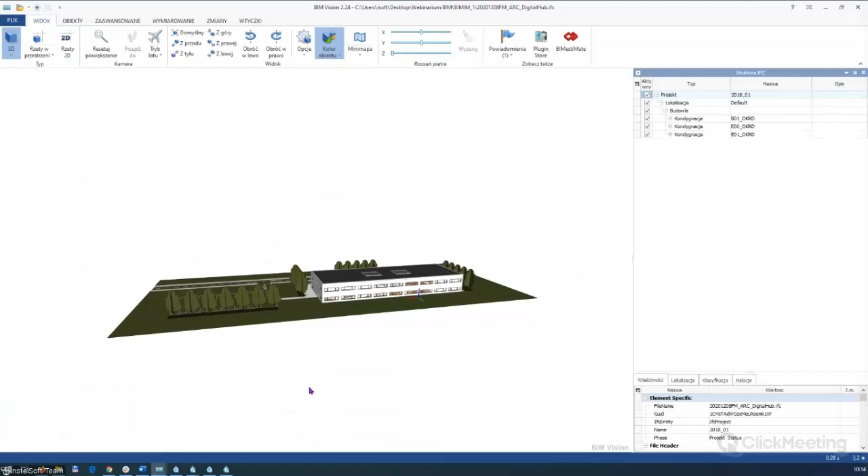First is this one, a simple office building in IFC format. That's the first one. The next one is

a sample from Revit. Maybe someone knows this project - when you open Revit software for the first time, you can find this project. We will also work on this file for today.

The next one is this one, a simple house. It's simply a 2-story house with a sloped roof, and the last one is that one.

It's the example of Villa Tugendhat from the Czech Republic. Maybe some of us know this project.

The scope for today's meeting covers many areas of our software, so some knowledge of our software is already necessary. In addition to the presentation of modules and the path of import and export of IFC files, we will also cover tools related to creating a building structure, calculating the heat load of a building, and designing both heating loops and water installation in the basic scope.

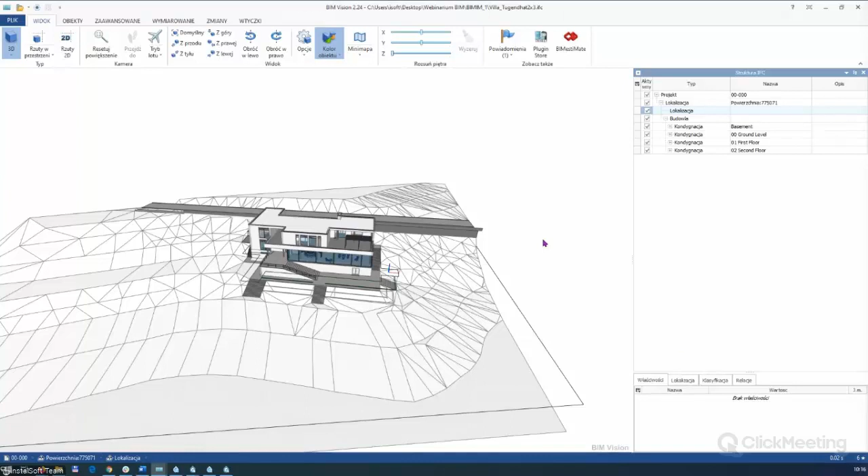So maybe I'll open a new project. A recommended path to use the program for importing and working with IFC models, with a discussion of individual tools.

Our new modules allow you to import a building model, including installation and equipment, from IFC files, both the older and the newer IFC4 version. Import is available under this button, so just click on it and choose your IFC file.

That's the first one, just click open. We have the possibility to open IFC files or IFC zip files. So I click open, and information import of the IFC file is performed as an independent model available in the underlay.

Maybe I'll change to the 3D view. That's our model from the IFC in InstalSystem 5. Loading the IFC model can be performed for any project, new or with an existing building structure or installation, including full delete and replacement of the existing model. So you can re-import this model if you need.

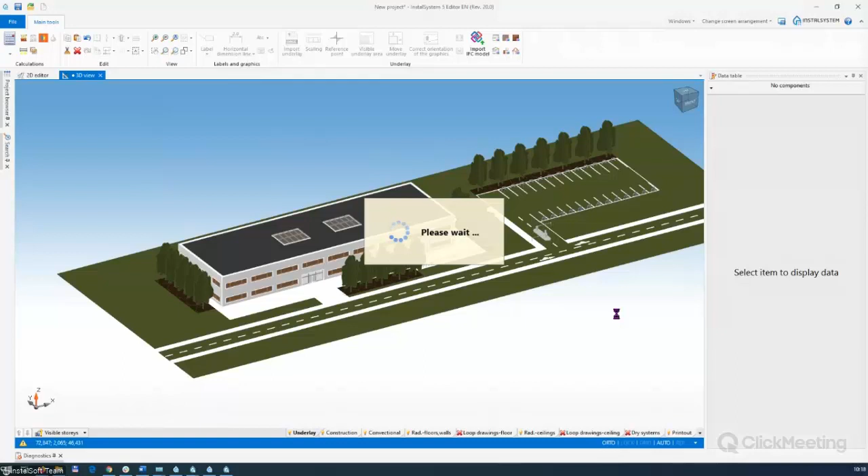This means that if we work with many industry professionals, there may be several such files in our project, and we can easily coordinate. When I unpin the project browser and change the scope to the underlay, as you can see, that's my first model - the architecture one - and that's the second one, the ventilation system.

We have the possibility of precise model management, including preview of the full structure of the IFC file, preview of the properties of each element, hiding and searching for elements using the project browser window. So I can unhide, for example, all the stories from these IFC files, and if I want to see only the IFC space, I can uncheck this one. Look at this - click on the IFC space, and the last one is the IFC space.

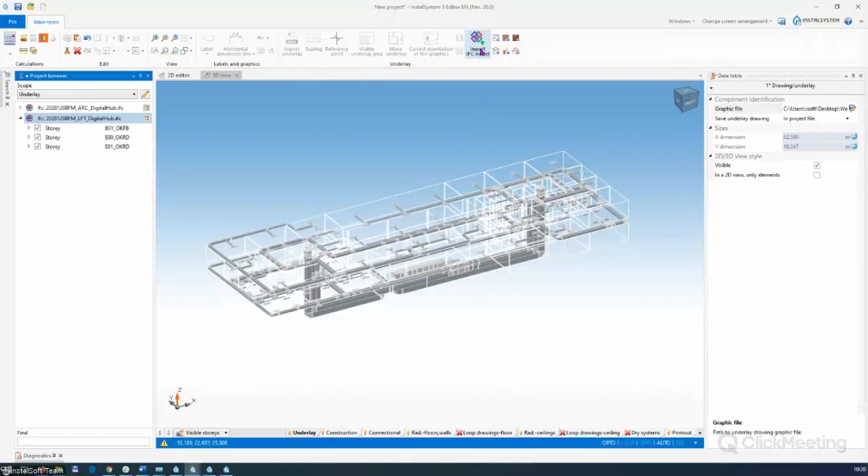So now I have two models. First is the architecture one with the IFC spaces, and the next one is the ventilation system. Remember that if you have a much bigger project, for example a heating installation, you can open this model. Please wait, and you can see it in your 3D view.

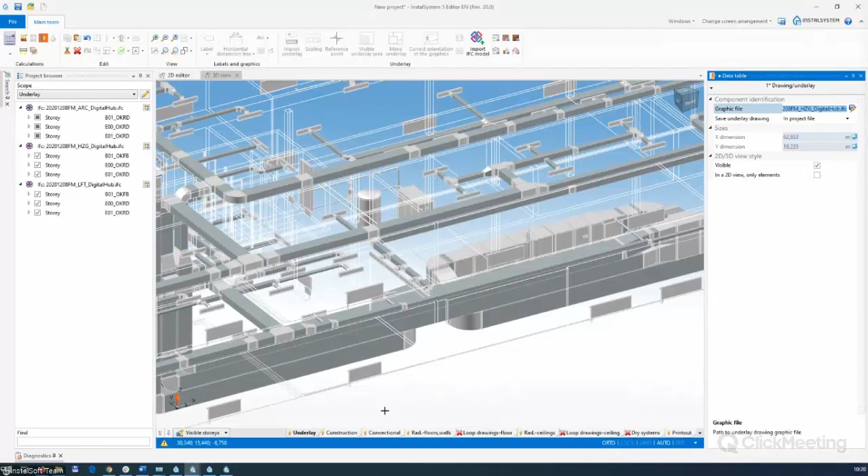Yes, and at this point there has been a great rebuild. So as you can see, we can preview in a very precise way the entire structure of the IFC files and expand the structure into individual branches. This is a great help.

Using this button, you can expand the detailed view of a given IFC model. As you can see, we can load IFC models containing both our architecture and installation, designed and exported previously from the InstalSystem 5 program and from other programs.

This means that we can hide or show down to the smallest elements or given groups, with the help of those things we want to see in our program, which has an impact on our design installations. All of this is also associated with the data table.

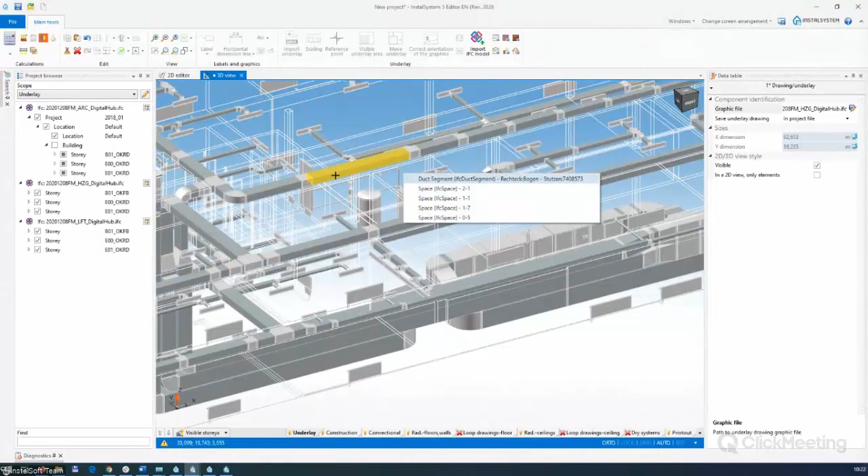There you can find information displayed about each of the items in the IFC files. For example, I can click on this one - it's the duct segment. As you can see, we have information, we have this element in the project browser.

You can click the right button, find in active windows, of course. So this is this element, and here you have information in the data table. If you want, you can make this element invisible - it's working in the project browser, 3D view, and data table elements.

The whole is additionally supported by the search window, in which we have prepared some predefined elements. Maybe I'll unhide this project browser and unhide the search window, and as you can see, we have the search of the underlay scope, and here we prepared some predefined IFC elements. So if you want, you can choose select in rectangle, for example, or select all.

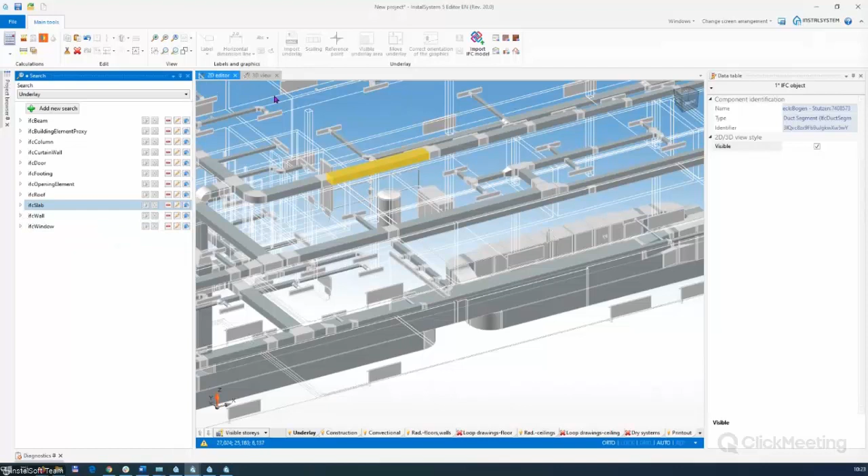You can unhide elements from the IFC file if you want. What's the important information? It's the new one, because the model is visible both in the 2D and 3D editor. The 2D editor draws it as edges, and the 3D view shows the real model. Of course, the whole thing is interdependent.

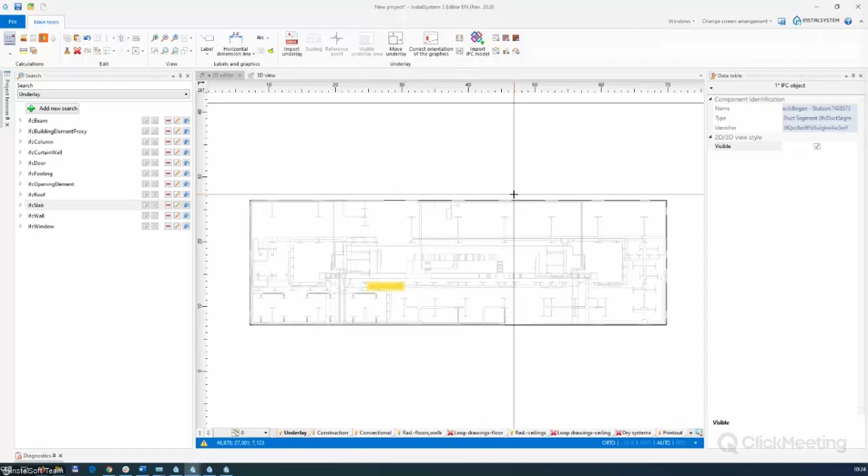So in the case of many windows or even monitors, one marked element or group of objects is marked among themselves in all active windows. These elements are also marked, and with each hint appears information about what the element is.

What's important, the next one - maybe I'll go to the project browser and hide some elements. Of course, we can delete the models if we want. And the next one, okay.

And the last information is that we can also perform export of IFC models to DXF, DWG, and PDF formats. Except from the fact that we can export installation to IFC, we can still make 2D prints or model prints from our 3D view as before, including IFC files.

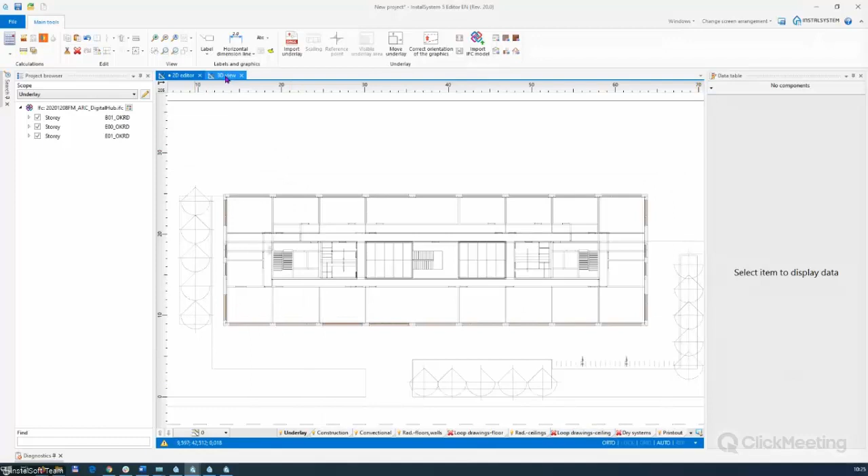So what's important for us, maybe I take you through some words about what's the user path from the user point of view. First of all, when you have the IFC file, the user loads the IFC file.

You can find the toolbar button in our program on the 2D view or 3D view underlay, on the underlay range. The area is visible in the 2D and 3D editor, and as a matter of settings, the visibility is in the project browser window.

So if you want to make some of the elements invisible, you can just click, and that's how it works. At this stage, the file is visible only in the underlay area and is not interpreted into an InstalSystem object.

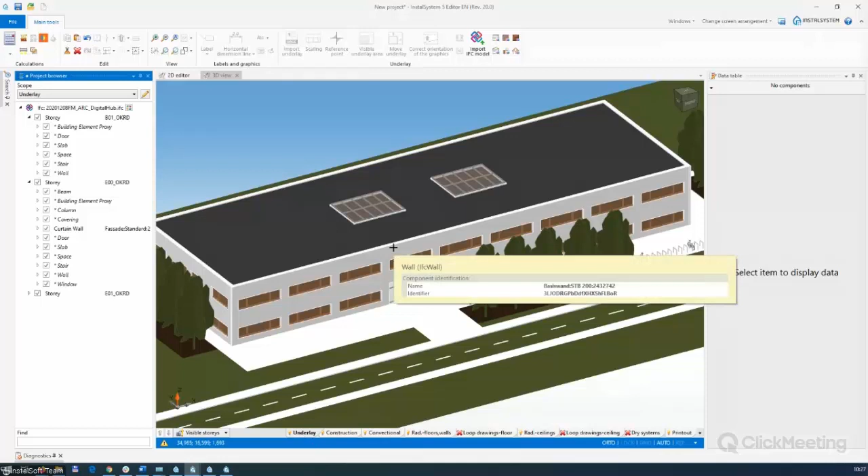And the last thing important for us is that the program allows you to load many IFC models into our program. For example, it could be an architecture model and a ventilation or heating model, etc.

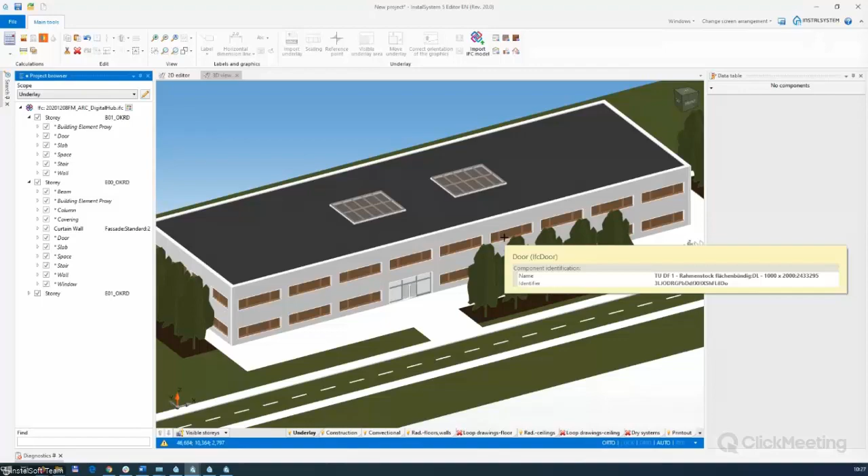And this is, in short, the whole information about the first IFC-based import model.

However, we have prepared and built a new module which complements the module that I have presented to you. It's an interpretation of building data from the IFC files.

A new module that allows the interpretation of structural objects from the IFC file into InstalSystem 5 structural partitions for further use, among others, for building thermal calculations.

What's important is the first point, because we prepared independent tools for various controls on the toolbar field of construction, which in this respect will be able to perform interpretation of stories in two ways.

So maybe I'll open the same project. Now I have one model, and we can make interpretation of stories in two ways.

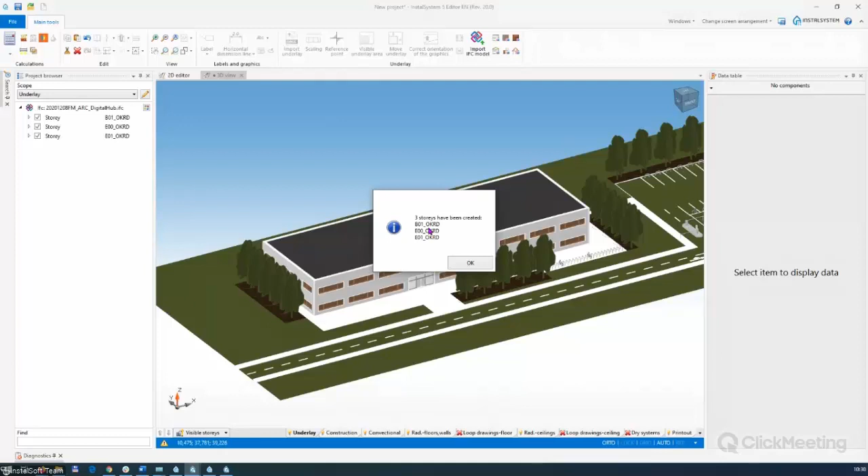If the roof is an independent story, it's okay. It may be so often, the program can handle it too, and then we recommend using a fully automatic mode. So this is what we do on this project.

The program will create the appropriate number of stories based on the IFC stories.

So after creating levels, I have a preview of them in the manager of stories in the list of sheets, and you can check the general data in the stories management window, and as you can see, we have exactly the same stories in InstalSystem 5 as in the IFC file.

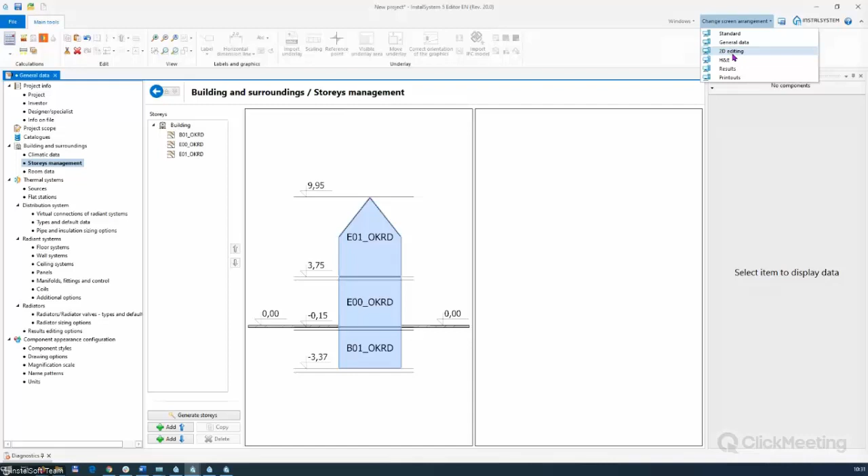Maybe I'll open the 2D editing, because we introduced some more about this, because when you click on the IFC model from the project browser...

...we help with setting the visibility of the IFC model in a 2D projection. I can select, as you can see, this is this field.

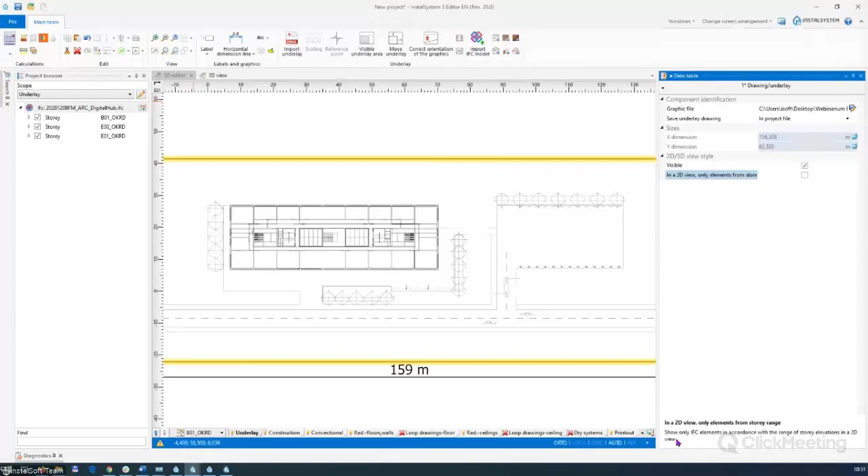I can select a given model in the project browser and use this checkbox so in a 2D view only elements from a stories range are shown. Here you can find a description of this function.

This is a great function because I do not have to change the visibility after switching over after this interpretation of the story. However, we leave this choice to the user because there may be situations where we will still want to see the whole model, for example, elements of the story located below or above, for design purposes.

However, maybe I'll open the next project, the new one.

Okay, the new one, because if the stories do not comply with the logic presented in stories management in general data, for example, the architectural model as a building contains 3 stories, but there are parking, trees, infrastructure, and some other things around, defined in such a way that they are on separate stories.

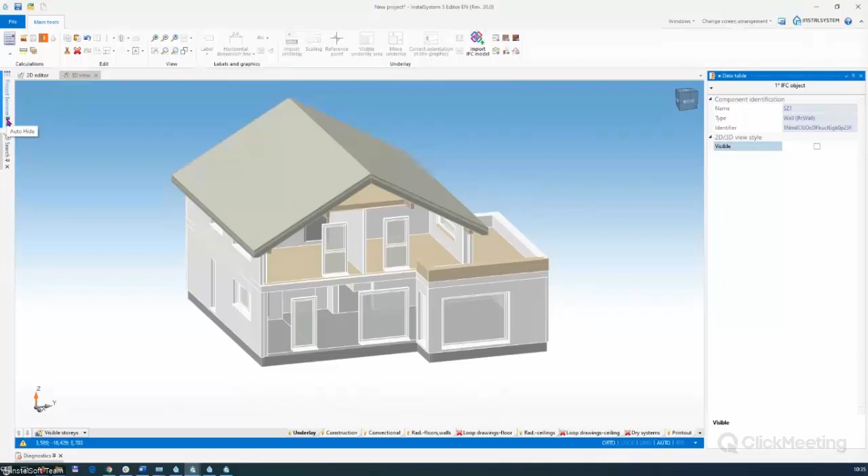We use this function to create stories after selection of horizontal structural partitions, for example slabs or roofs from the IFC file. First of all, I want to say the process is very simple. Maybe I check the wall from the 3D view, make it invisible, this one and the second one. I use the project browser or the search window for my purposes. In the case of 3 floors, we have to mark 3 slabs plus a limitation in the form of a 4th slab or roof in advance. So selecting 4 elements will create 3 floors.

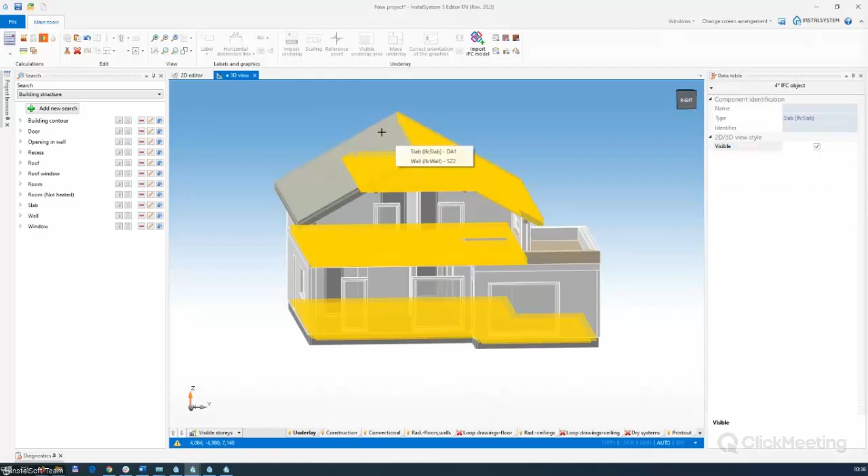So I start from the first slab, then the second slab with the Control key, then the last slab, and what's important, I need to select the 4th element - it's the roof. Maybe I click on this cube, and as you can see, the first slab, the second one, the 3rd, and the 4th.

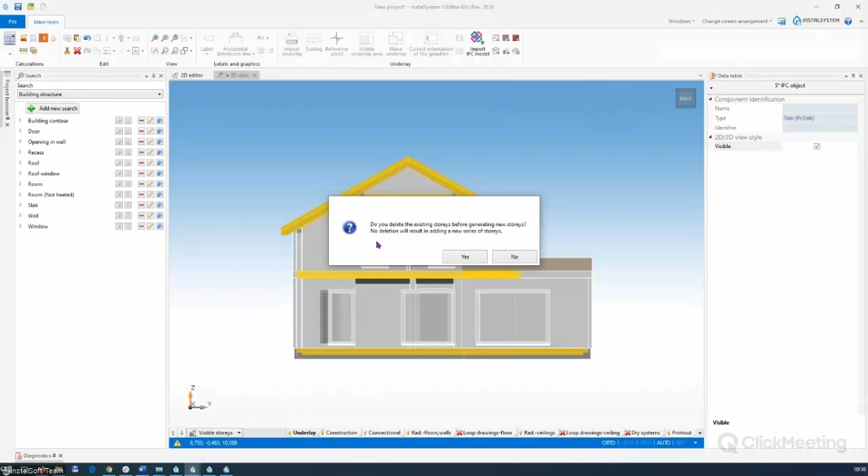Then you click on this function, create stories based on slabs. We get a message asking if we want to delete the existing stories - I click yes. As you can see, after selecting 4 elements, 3 stories have been created. I click OK, and now I need to go to general data and check the stories management.

If we have a sloped roof, we must additionally verify the thickness of the roof for the last story, because in the case of a sloped roof, the program takes the entire range from the highest to the lowest edge of the roof and creates thickness from it. In the next version, the program will do this automatically. So just click on the last story and change the upper slab thickness, for example to 30 centimeters, fill this field, and click OK.

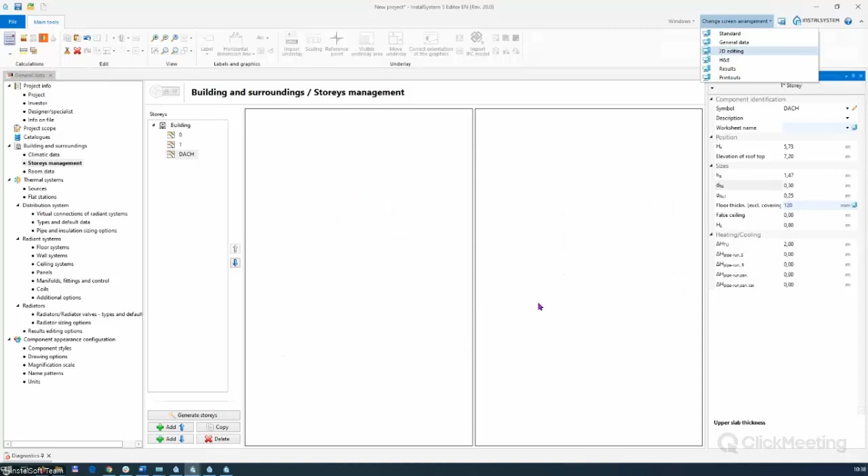Now I can go to the editing, and for my goal I can change the scope to underlay - that's my 3D view. I click on this checkbox, and for my next step in the 2D editing, because now I see all the things from the IFC file on the 2D editor, I click on the IFC model and click to show in the 2D view only elements from the story range. So now, for example, for story 0, I have only the range from this story.

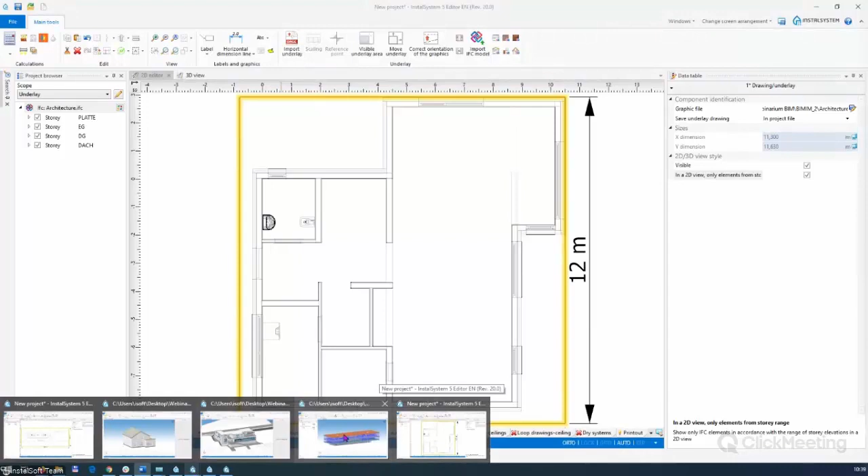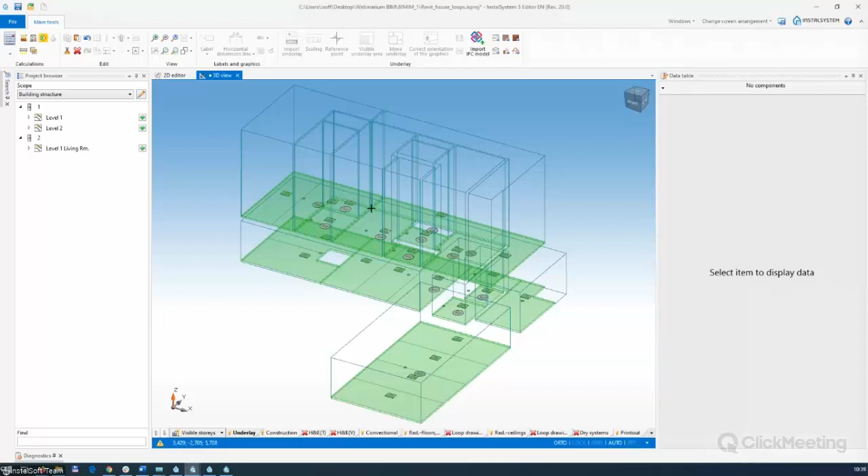Now I'll open a ready project of a sample house from Revit, where I want to show you the last example. I'm looking for it - yes, this is my project. Maybe I go to open and look for this, it's the first one, Revit house loop. I switch to the 3D view and make this invisible when active.

Because if we count the installation based on the coefficient and we have stories that shift between each other - which in our program we call a series of stories - this is when we use the second use of this function and select 'no' from the dialog box. The program creates a separate series of stories which can symbolize differences in levels. In this project you can find this situation.

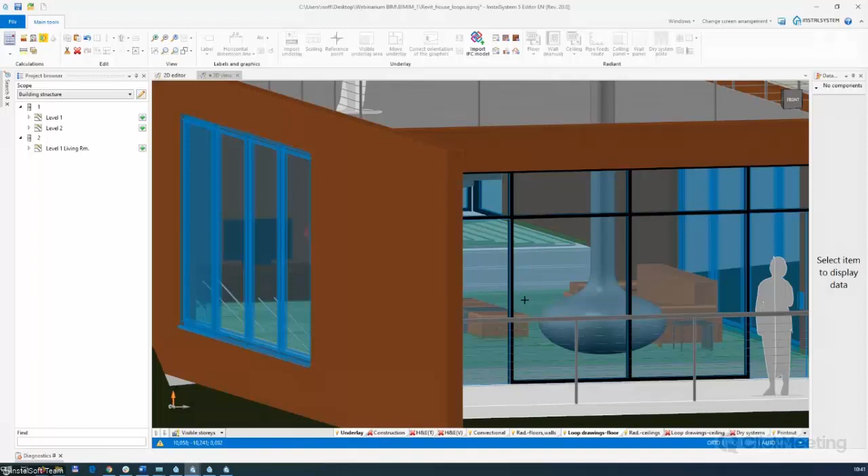As you can see, we have one series of stories - that's the first part of the building. I create the installation based on this IFC model from Revit, and that's the second series of stories. As you can see, we have a situation where we have shifted levels. When we go to general data and stories management, as you can see, that's the first series of stories, and that's the second one.

So we create them by using this option a second time and clicking no. So the program, by using this function a second time, creates the next series of stories - it's working in this way. So it's very simple. This project is based on the coefficient, but of course, if you want, you can make the full interpretation in InstalSystem 5 based on the new modules in our new generation.

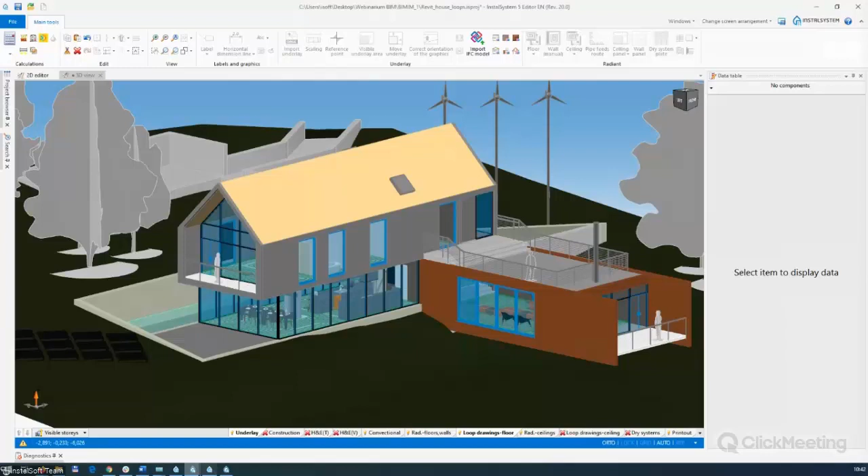Maybe I come back to my project because I switch to the 3D view, since the next step is the interpretation of building model to the elements of InstalSystem 5 construction. Then the user can convert construction to logical partitions.

I will show you this interpretation on one model, which is quite easy. A more advanced version was shown as part of our webinar in Polish, so in order to not duplicate the entire path, I invite you to see this fragment - I think you should be able to handle it. I have already prepared three ready models, which we probably wouldn't have had time to do today.

So I will only show you the calculation of the thermal load. What's important for us: when we have the model, and then when we have the right number of levels based on the IFC model, we can make an interpretation of the selected elements of the IFC structure.

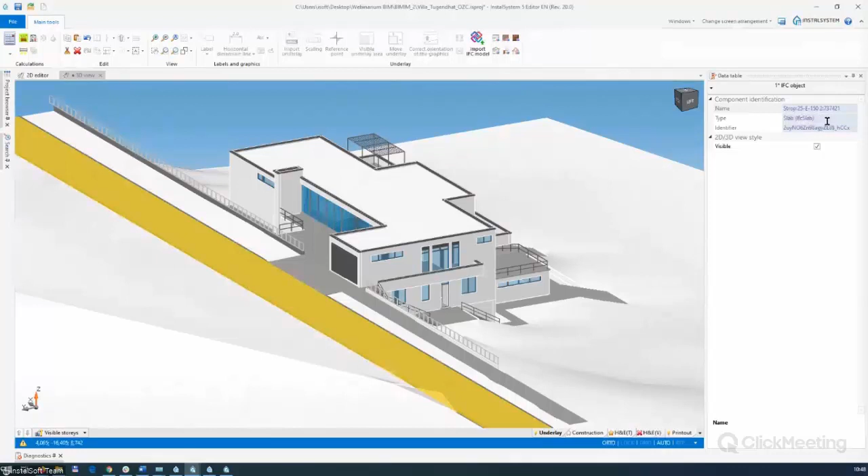This is a simpler project, and we don't have any unnecessary elements on this IFC file. But if you open, for example, this one, I can show you the next step. If you open this underlay scope, as you can see, for thermal calculation it's not necessary to make interpretation of an IFC slab like this road.

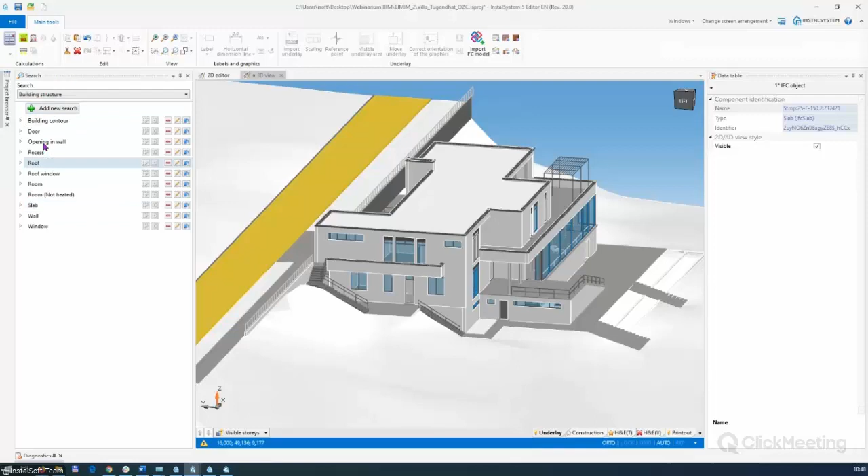It's unnecessary, so if you uncheck this element in the project browser, or uncheck the visibility in the data table, and select all elements, for example by the search window, like IFC slabs, this element will not be interpreted. That's important for us.

Maybe I come back to our project. This is this one.

What's new in our InstalSystem 5 model, and it's extremely important for us, is that we can modify elements interpreted into InstalSystem 5 elements - we can move them, make corrections, or delete them. So first of all, let me show you the path to make the interpretation of this building.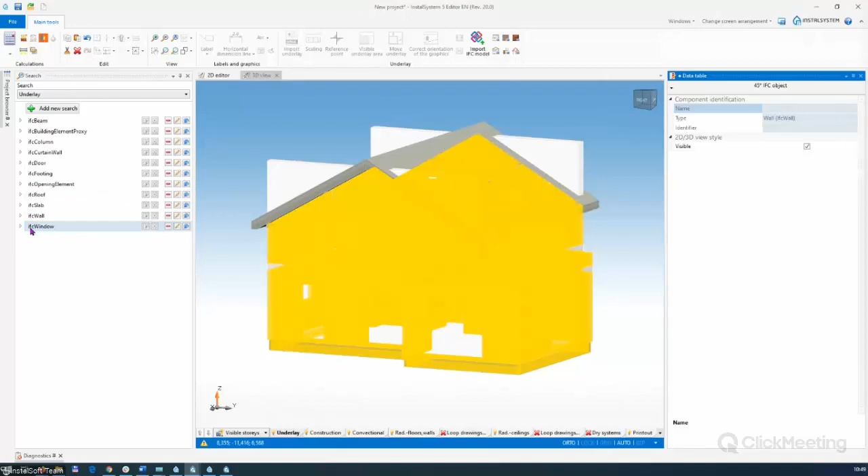I use the search window, and first of all I select all the walls, for example by select all, and then use the function create walls based on selected items - this is the first function. Then we can select all windows, IFC windows, by select all, and just click on create windows.

The next element is IFC Door, so click on them, select all elements, and click again on the same button - the program automatically recognizes that this element is an IFC Door, so you just click on them. Maybe I change the visibility of the construction to only show when active, so now we have such a situation.

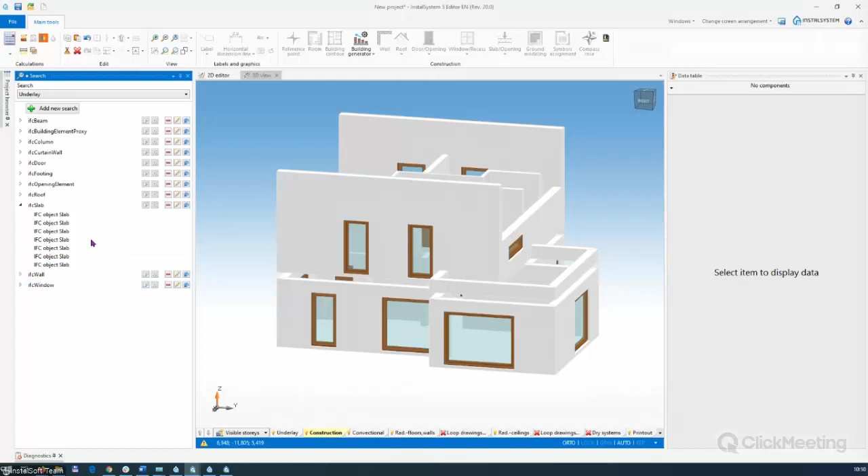Then the next one is IFC slab, so maybe I select them - that's the first one, this next one.

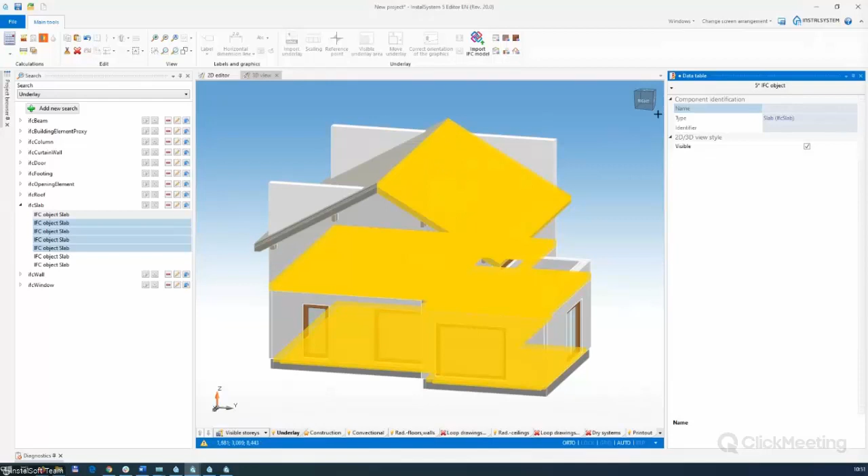Okay, that's interesting because, as you can see, the architect creates this roof and makes the name of the IFC slab. If you want, you can unselect this element, so it's not necessary to create the slab based on this slope roof. So I recommend to uncheck this element and select the next one. Okay, so I click only on create slabs based on selected items. Now I have the slabs, and the last two slabs in IFC.

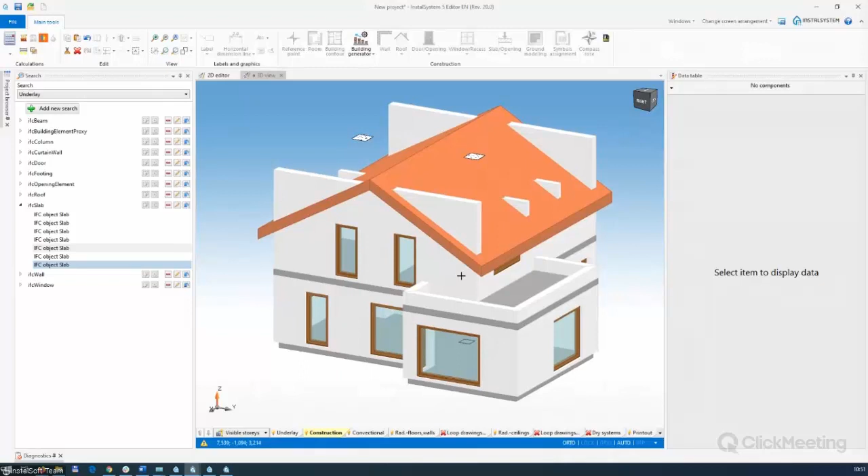But if you want, you can use the function create roofs. So just click, okay, and then when you change to construction, we have all the construction and partitions. And then after that, I click on the building structure calculation. Now, as you can see, all the rooms are automatic.

So that's all. That's the real model, IFC model. And that's the construction based on this IFC model. Maybe I change the visibility to the editor and go to zero. Okay.

I said before that users can modify elements interpreted into IFC elements, and we can move them, correct, or delete them. This is an example you can see at the very beginning of what is not the same with the logic in InstalSystem 5. Here is a small detail, but it does not comply with our logic, which is the direct reason for the lack of recognition of automatic rooms. As you can see, we have on the construction only one automatic room.

Why? Because when I go to search and click on the building structure and select the walls, maybe by this function, select in rectangle, okay. As you can see, we have a shift of the lower edge by 1 centimeter. I don't know why. I honestly don't know why this is in this case, in this project.

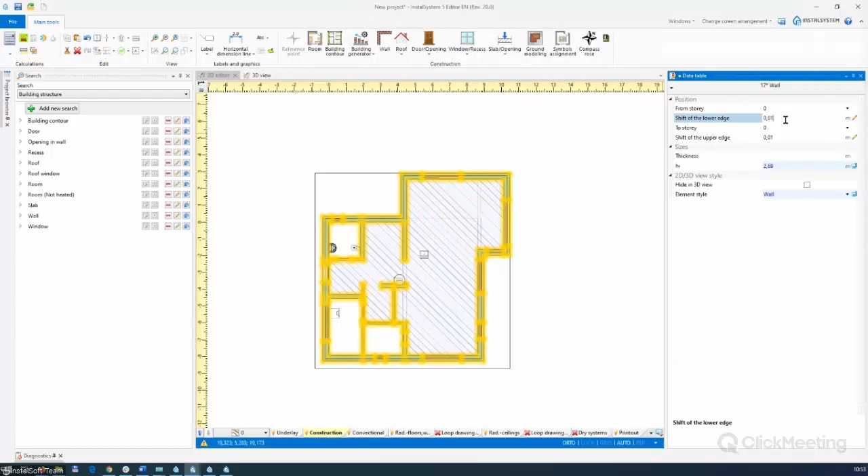However, we can easily modify it as a group. So just click and put zero, okay, and make the full calculation, building structure calculation. And as you can see, we have all these elements on all automatic rooms on this level, okay, and I can switch to the 3D view.

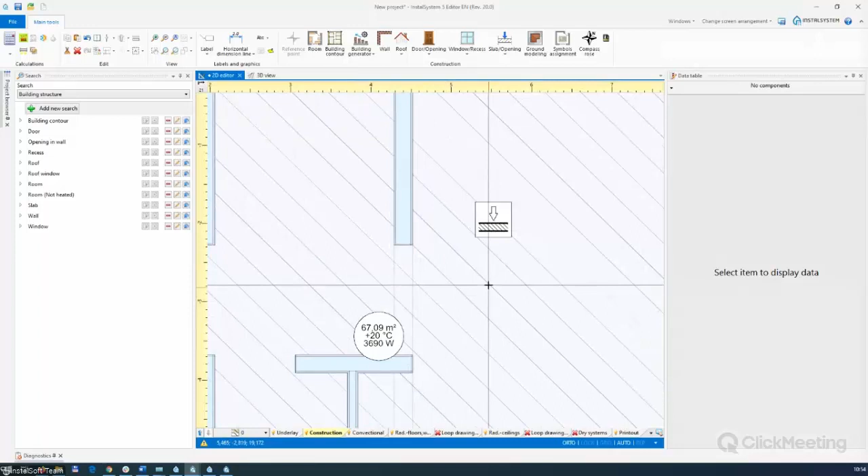Remember that elements like wall, room, and others snap to the elements of the IFC model. So if you have some lack, I don't know, maybe the wall, you can easily... maybe I could show you the example. The program snaps to the editor, and if you want, you can create your own wall. As you can see, just click tab and you can make something like this and change the thickness for maybe 20. Okay, so it's working in this way.

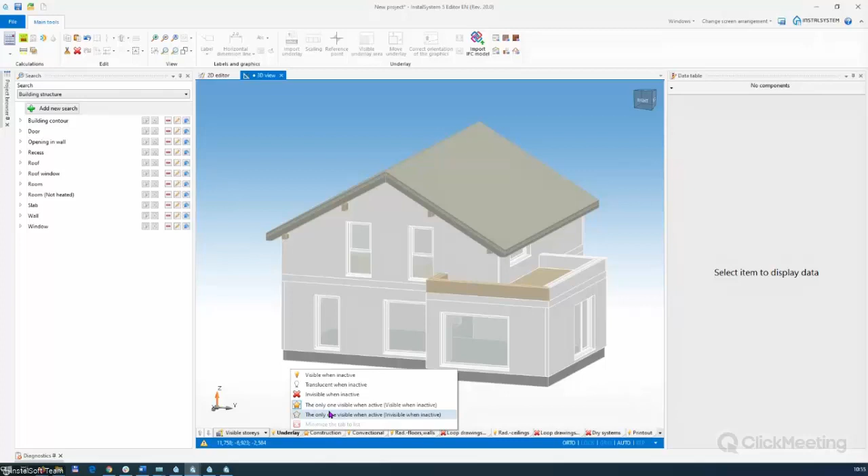Remember that elements listed above may exist simultaneously with the selected elements. They are on a separate scope: base, underlay, and construction. So please also remember when you switch to the 3D view that you can use functions like, for example, invisible when inactive, or only one visible when active. That's the construction. So, for example, I choose this function, the only one visible when active.

This gives us at the moment two user paths, in the future three, that is interpretation of the rooms themselves as plans for the future. But for today, I show you the interpretation of the entire structure. That's the full option, because based on it we can make the heat load calculation.

And of course, if we don't need to make the interpretation, or we want to only use this IFC model like an underlay, you have the ability to manually operate on a model that behaves like a regular underlay.

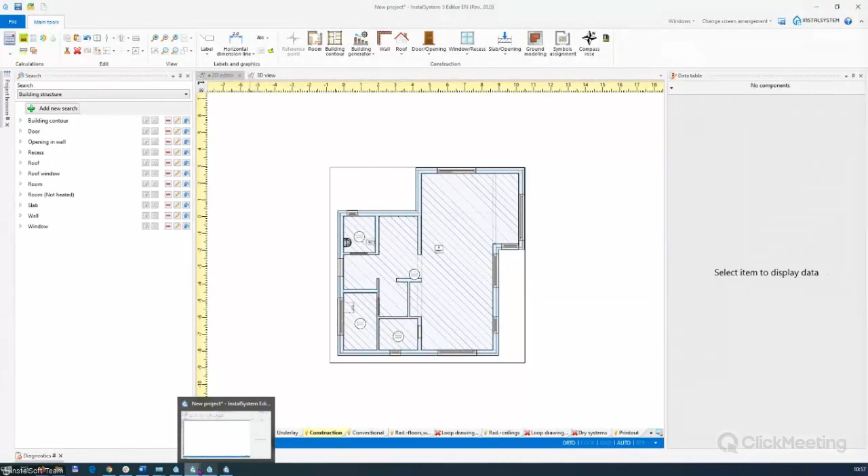Maybe I open this project. Okay, that's this one. This is the IFC model. I import the IFC model to the InstalSystem 5 package.

Maybe you know this project, because it's Villa Tugendhat. It's the architecturally significant building in Brno, Czech Republic. It's one of the pioneering prototypes of modern architecture in Europe, an icon of modernism. Preparing this project took me about maybe 20, maybe 30 minutes to make a thermal model.

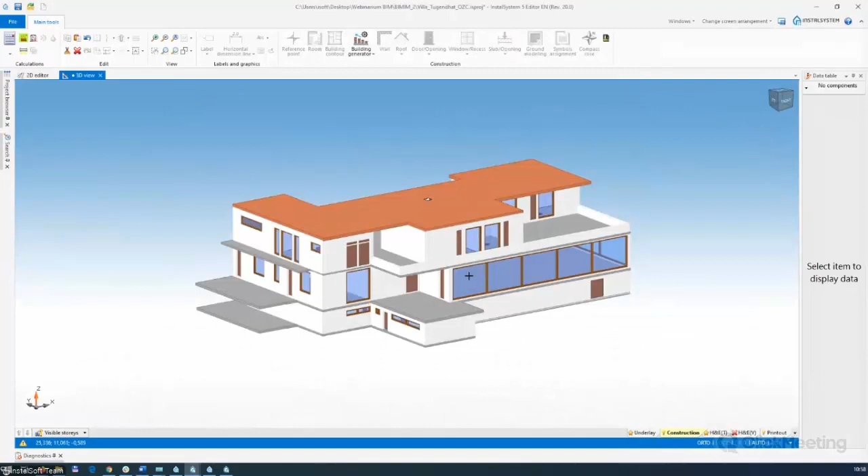Now I'm on the underlay scope. When I change to construction, that's the construction, and that's the heat, and that's the thermal model based on this underlay. If I want, I can check the visibility, visible when inactive, for example, and the same one for this. And as you can see, we have the thermal model based on this underlay. So it's very simple.

I think that drawing by hand from the underlay could take several hours. So it's a big difference between 20 minutes for now and several hours otherwise. So of course, in theory, you can do it because our model can behave as an underlay, and we can snap our walls to the walls of the model.

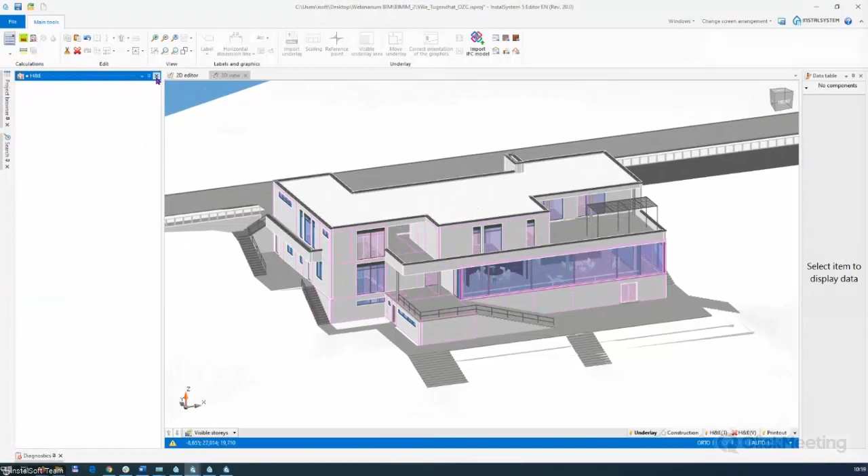Maybe I open the heat and energy window because I changed the screen arrangement to heat and energy, by loading, I changed the scope to the heat and energy.

By loading the ready-made definitions of partitions for this range and performing complete calculation definitions, I open and click OK. That's ready-made partition definitions.

After making the full calculation of the building structure and thermal calculation of the building, wait a second, for this range I can perform complete calculations.

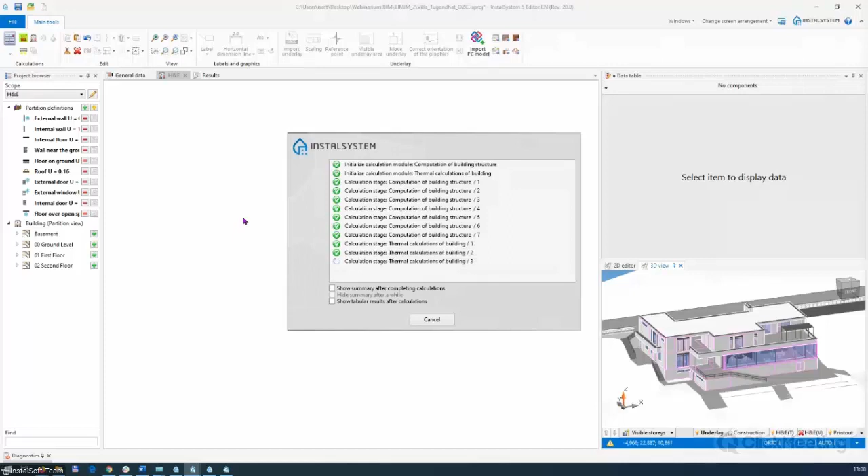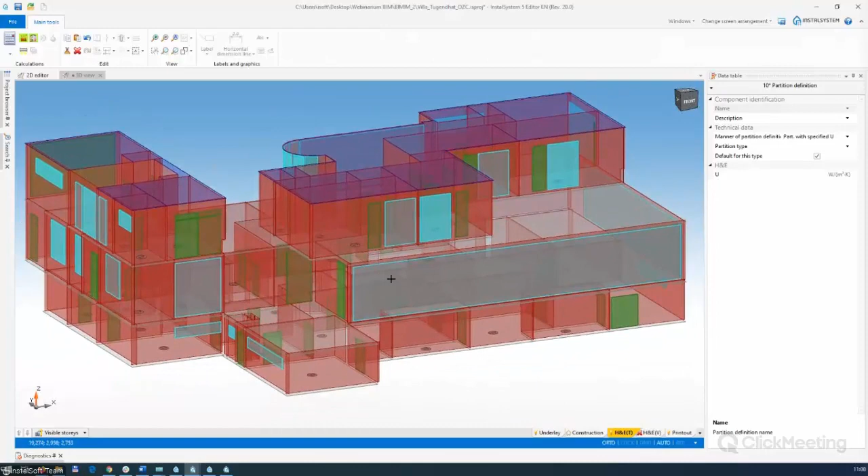We can see the result for this building, but before that, I change the visibility maybe to 3D editor. As you can see, on this range we have the full model, and when I change to result, I can check the result for this building.

It's very interesting. This model has about, as I remember, 1,000 square meters. As you can see, that's our result for this building based on calculation made according to the norm. Remember that you can change the heat load standard in calculation standard and options.

Very similar, because based on this first office building, I make the same. I make the full interpretation of this building.

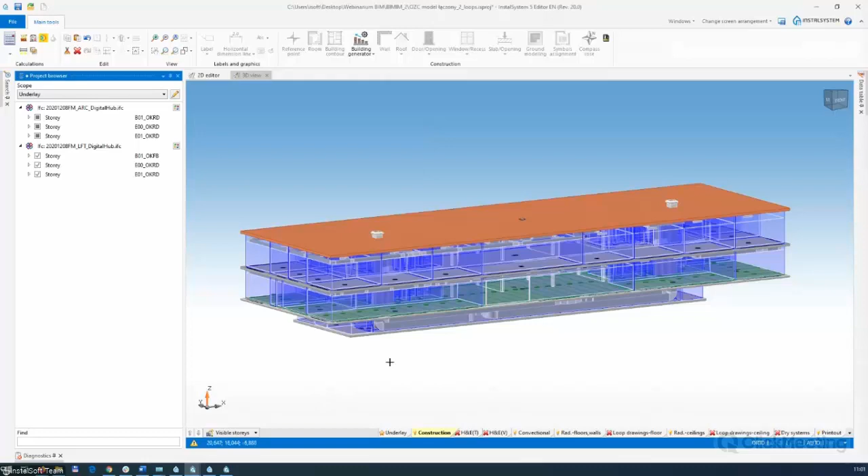So based on this building, as you can see, now I have only the IFC space, but of course I can click on all the stories. Based on this IFC model, I create the construction.

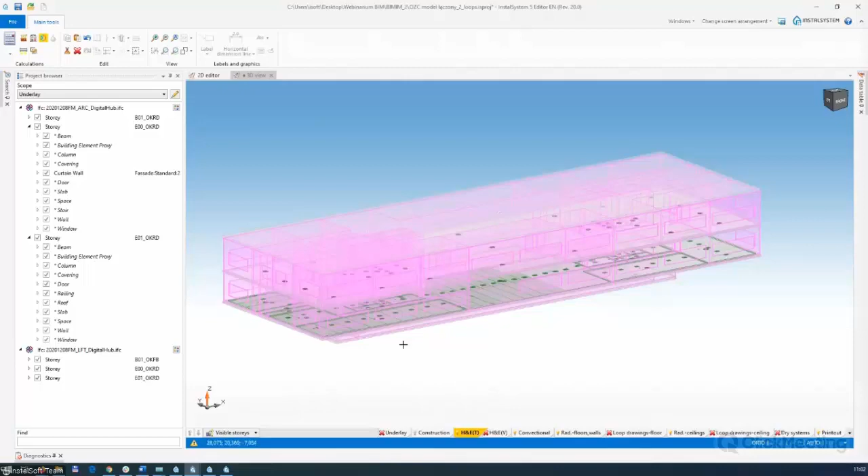The construction, and maybe I make it visible, and make the heat load calculation. Based on it, I create the simple installation with loops.

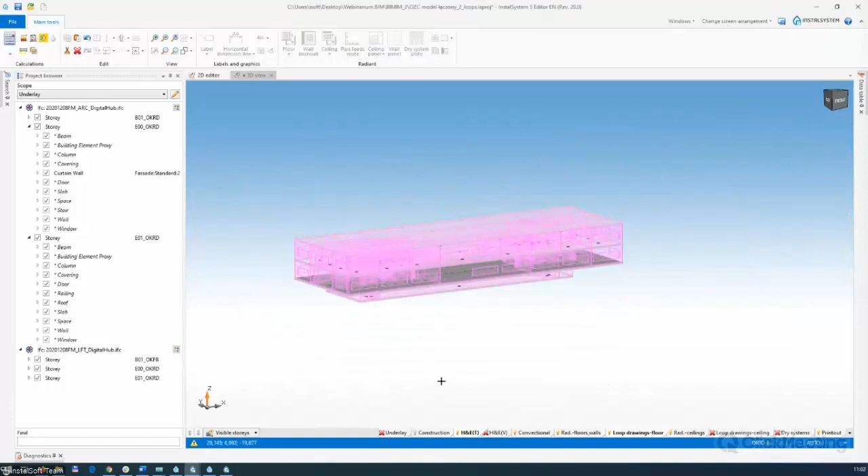So it's very simple, but for this moment, I recommend you see our Polish webinar on how to convert this model to full building structure. It's quite easy, but for today's purposes, I decide not to show you the entire path, so check our webinar in Polish.

I think that's all for this moment. I hope you can see how much time we can save and how many benefits you can get working with IFC models.

It's quite simple. Okay, so we can move to the next part of our meeting.

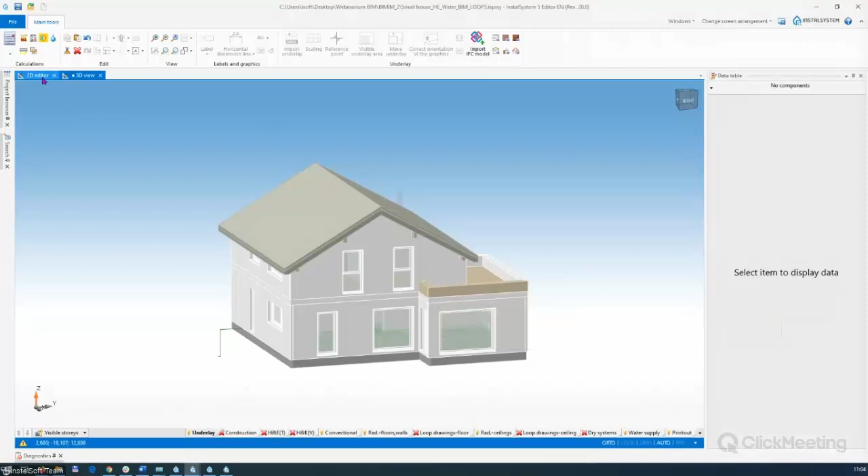Maybe I open this one, because based on our model, I make the full building structure calculation, then the thermal calculation of the building, and make a simple installation after my interpretation.

What's important for us? At the time of designing, the user can detect visually collision between the model and the elements of the InstalSystem 5 IFC.

Remember, if there is a change to the IFC model, you can replace it, and this replaced model is working with the interpretation tools. But the user can decide that if there is a change and this change is small, you can manually, for example, move the IFC object, a single wall, if it seems optimal.

So now, based on this project, maybe talk about some information about our new model.

Now we move on to the second part, and I will show you how you can now use the modularity of our software in terms of designing the installation and its export on this building from the IFC model. As you can see, we prepared two modules about export IFC files.

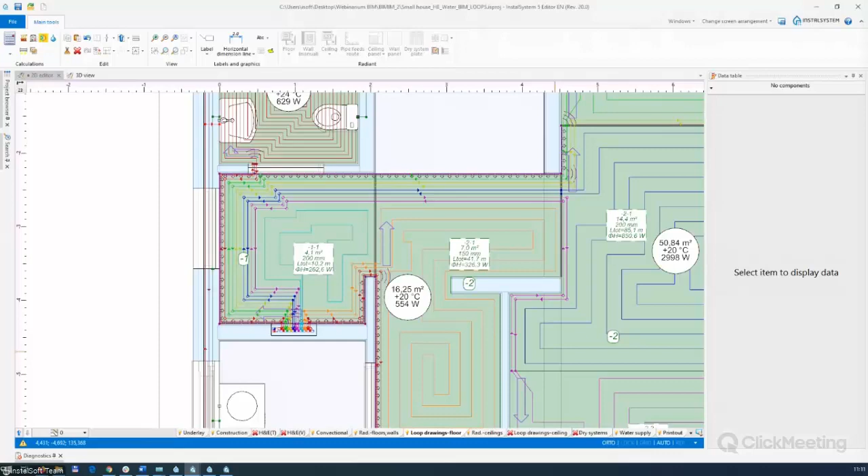First of all, it's worth noting that our heating installation uses the pipe feeds route element, which fits very well for the dynamics of change present during cooperation with many industries. Today I'd like to show you how, thanks to this element, the changes we make in design are cheap and can result from changes made, for example, by an architect.

Before making some changes in this project, the installation itself can be exported using the export button available in the printout scope. When you change the scope to printout, you get the new button IFC file export. As you can see, the description says export installations to BIM format like IFC for reference view.

So let me show you in 3D how this installation looks based on this model. Here we have the installation loops, okay? And here, based on the IFC model, I created a simple water supply installation.

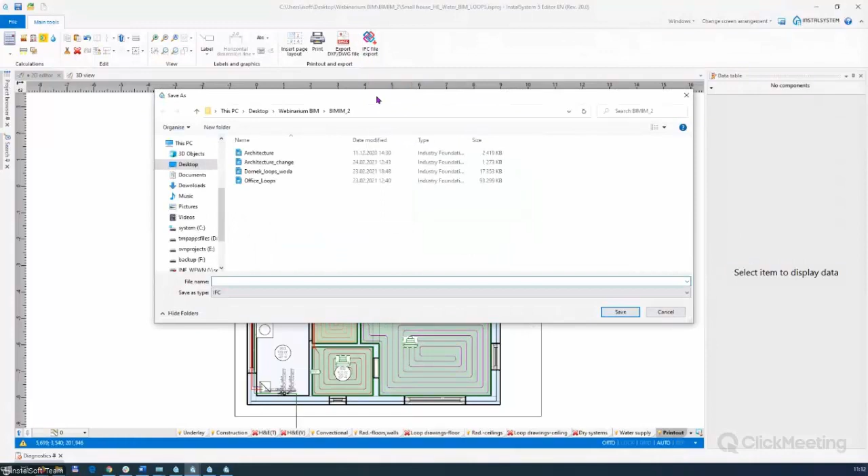When I go to printout, I click on IFC file export, and now I can change to this one, and that's my first model, okay? We have the option 'save as type', and then click on save. You need to wait for a moment.

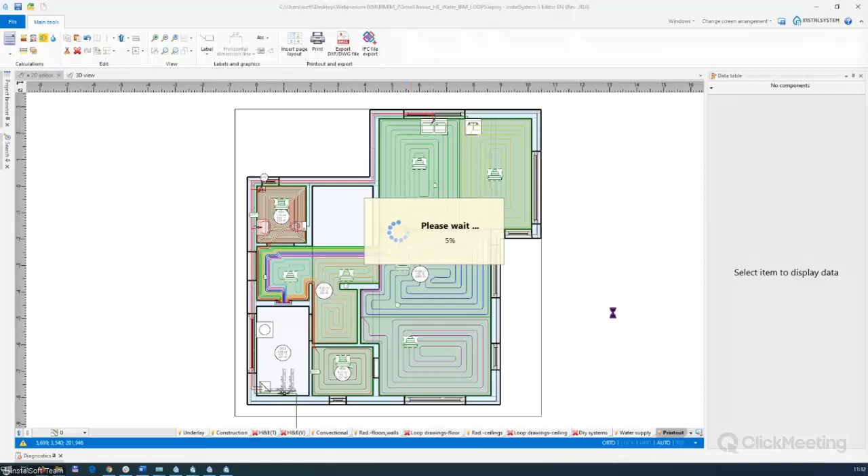Yes, 5%. After this operation, we can preview how the installation looks.

At this point I will open the free BIM Vision program. I'm looking for this project. Okay, that's the first model. So I open BIM Vision, and we can check how our installation looks. Okay, so that's our installation in an IFC4 file in BIM Vision.

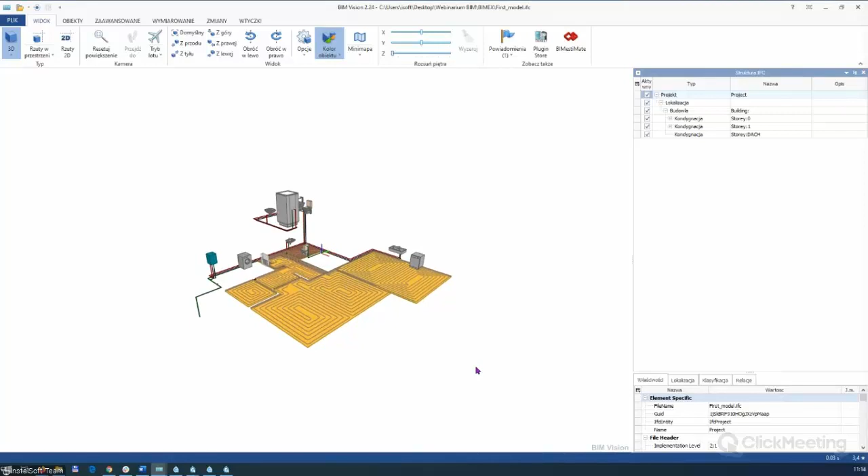That's the place where I opened this project. Of course, this project can also be opened in other programs that support the IFC standard, for example Revit, ArchiCAD, or Allplan. It's an open BIM standard, so all the most popular programs can open such files.

Obviously, this project is exported according to the coordinates of the IFC model. If someone works on CDE type platforms, for example, they can integrate this project with others.

So now let me load the second model in this program, and we will see what it looks like. Let me change the language - sorry for this Polish, we wait a second.

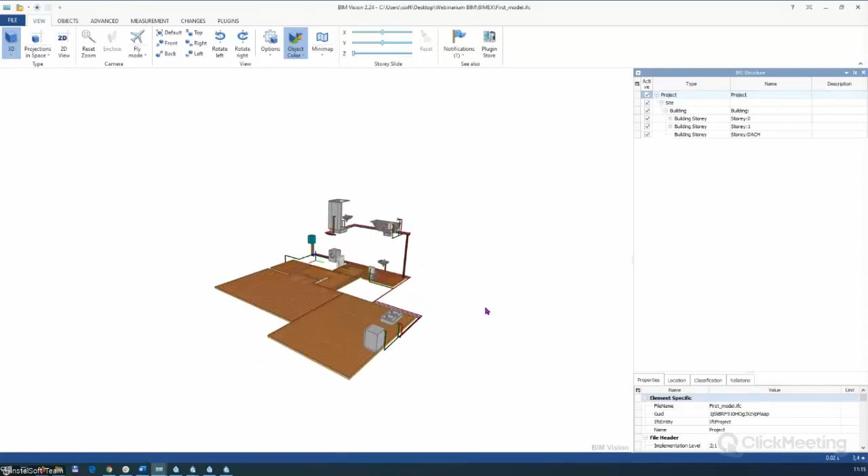Okay, that's our model from InstalSystem 5. After that, I can go to Add Files and open the architecture. As you can see, this is our model. Based on this, we created the full building structure, heat load calculation, and our installation that was then exported.

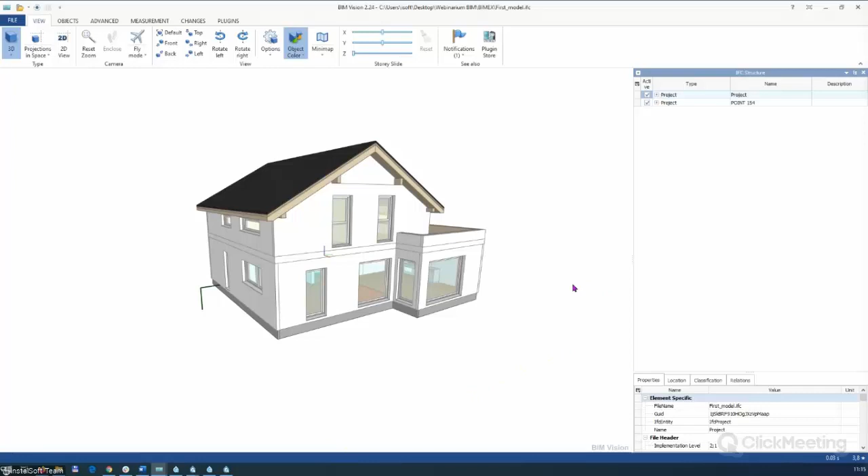Now let me make some elements invisible, like this one. As you can see, that's our installation made in InstalSystem 5, and that's the model from the architecture. So we can easily do this in other programs, for example ArchiCAD or some kind of CDE platforms.

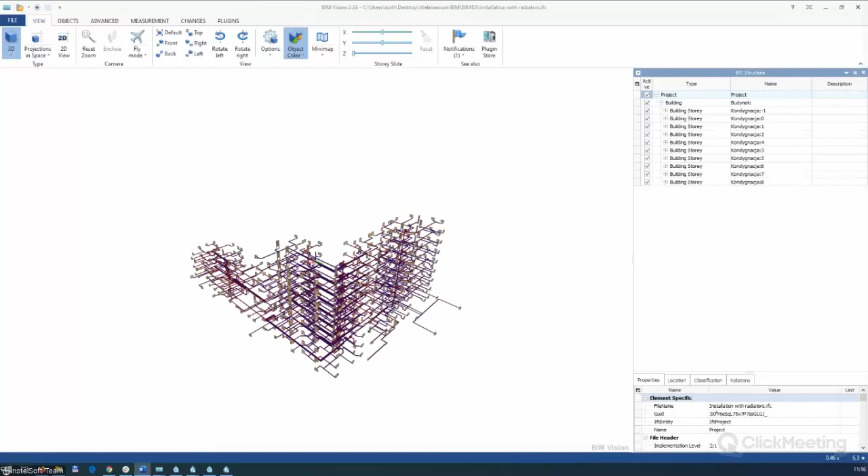Of course this is a small installation, so I'll allow myself to show you two other projects exported from our program. I have three projects prepared for you - first is the heating installation with radiators from our program exported to an IFC file. It's a big one, a large building containing an installation with heaters, as I remember. Yes, that's from our program, as you can see.

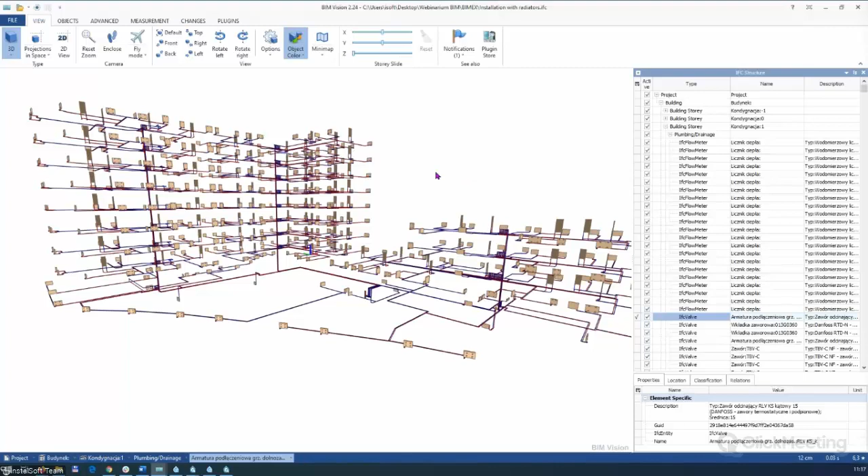It's the heaters from the InstalSystem 5. We can see what the structure of such a file looks like. As you can see, we have mapping, IFC, for example flow, meter, valve. We have the name and description. In the next publications, we prepared the full parameterization of the installation.

Now, because I exported this program based on Polish version, I have the name and description in Polish, but remember that this name and description, like type, size and others, are based on your language version. So if you work on, for example, English version and export this IFC file, all the name and description you have are based on your language, package language.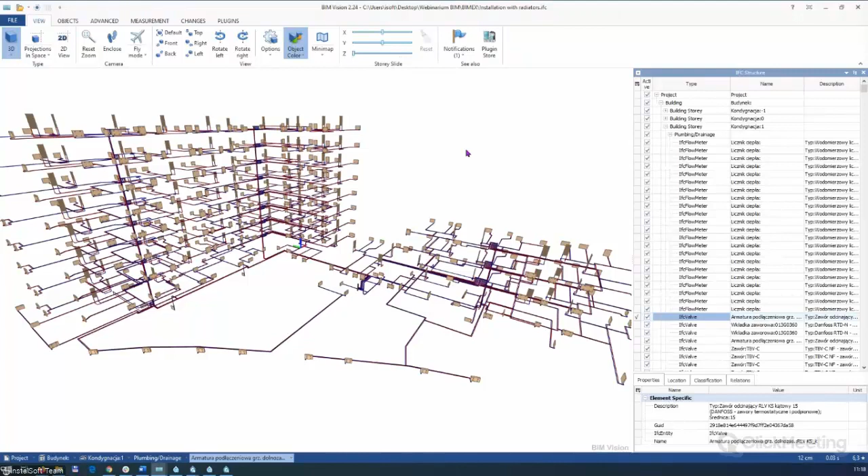Maybe I close this one and open the next project. As I remember, that's the flat station and tap water installation. So give me a moment. Yes, reading file, it's the flat station and tap water. As you can see, it's only tap water installation, exported from InstalSystem 5.

Okay, and the last project, it's the biggest one. It's the project that includes the installation of loops and panels along with the entire installation layout. This is a really big project that has been prepared for the Chinese market. So you can see what projects our latest version of the software allows to design, the new generation.

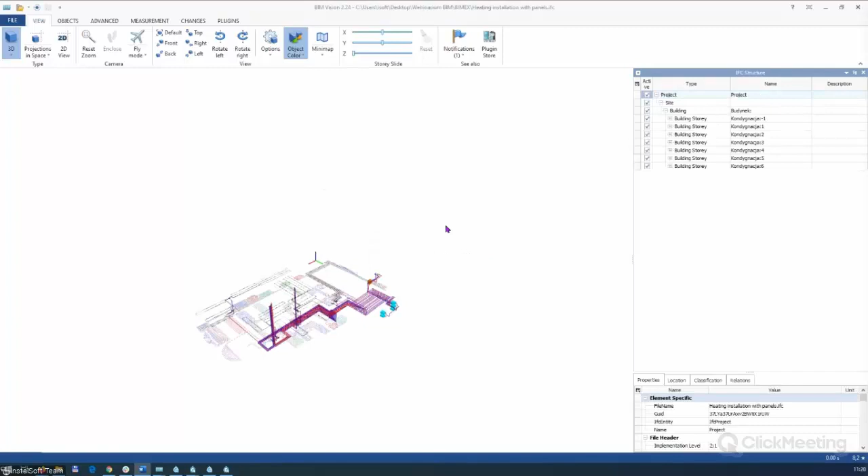Please wait a moment, that's a full installation with loops and panels. Yes, maybe 3 seconds. Okay, perfect. Okay, that's installation from InstalSystem 5.

As you can see, that's the loops and some other equipment. All these installations were prepared in InstalSystem 5. As you can see, here we have the loops. You can click on this, it's the covering and some others.

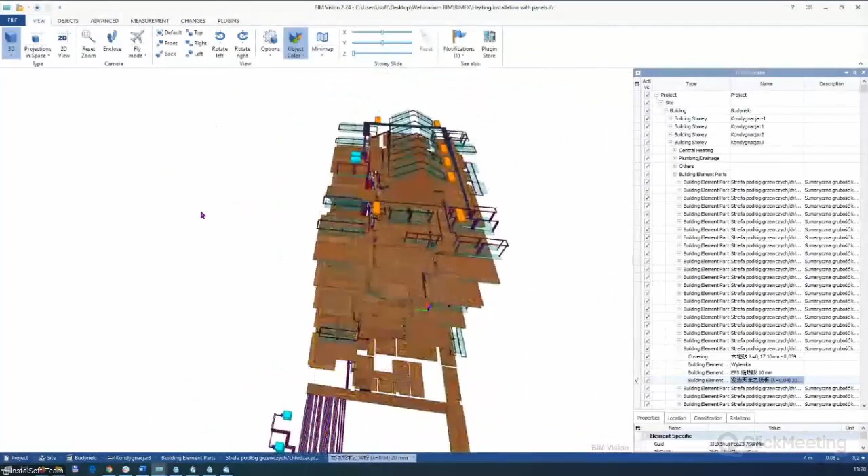So as you can see, this kind of very big installation with panels you can create in InstalSystem 5, and based on it, you can export this installation to IFC 4 format, and you can load this project, for example, to Archicad, to Revit, or other BIM platform.

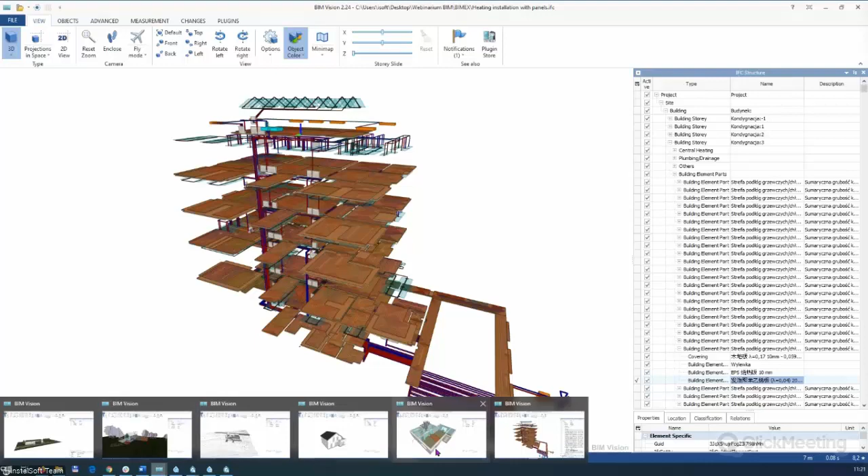Maybe we come back to our project, this one, because now we move to the last section of our webinar, because we want to simulate a change that may come from an architect. Maybe I close this one because I have prepared some example for you how to work with the change.

Now let's simulate a change that may come from an architect. Please see, I have the same design that I will open where there is a slight change. In this change there are no walls in this place, so I open this project in BIM Vision.

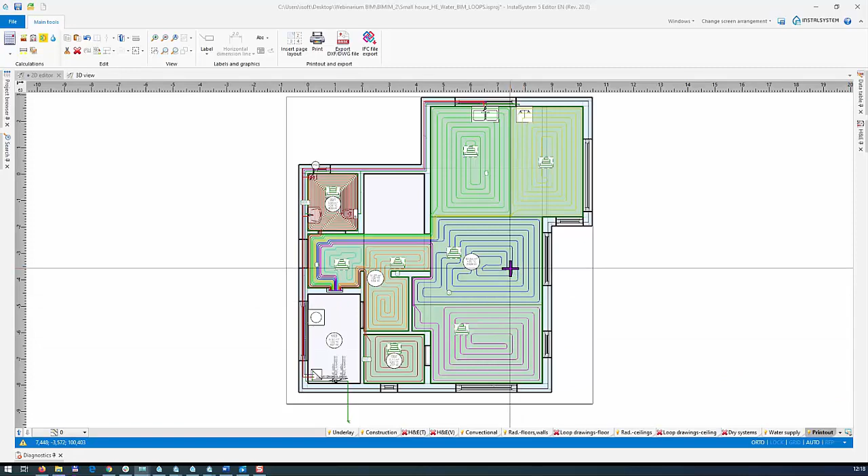We need to wait a moment. Okay, I go to the IFC structure and uncheck these two checkboxes. Okay, and as you can see there are no walls in this place.

In our previous project these walls were at this point, and how to work with it. So now I will open our design installation together with the model, with the last model. So, to be sure that this model is different, I go to underlay scope and hide these two, and okay, as you can see, this is the difference.

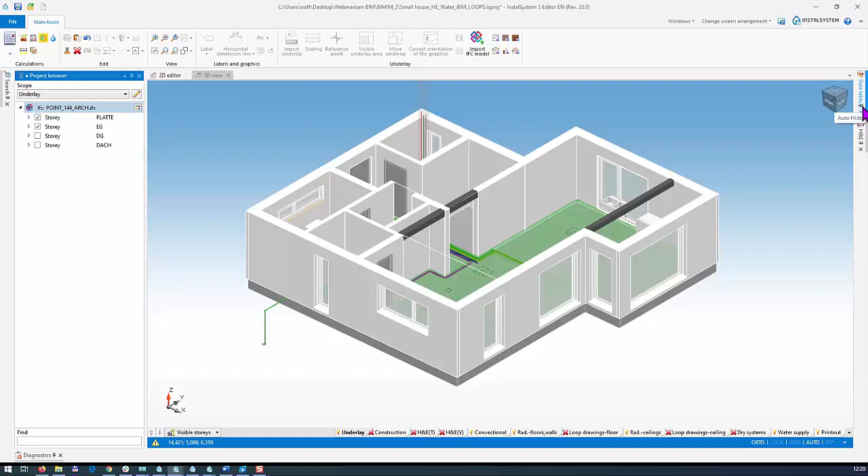Such a model within the project can be replaced any number of times. So we can use the project browser and just simply unhide the data table. Check again and just delete this project and use the import IFC model again.

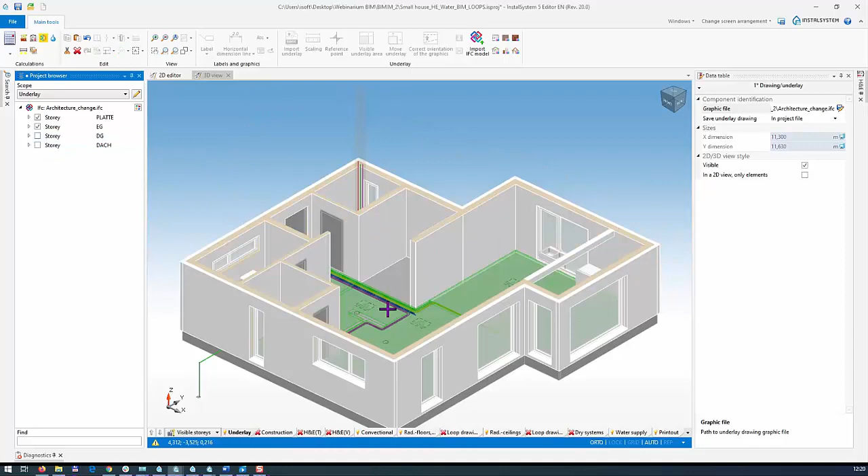Okay, I open the same one like in BIM Vision, architecture change. There is this change. At this point we have an updated IFC model. Let us remember that our building structure is still in previous condition.

The fact that enables modification of the structure means we can easily and quickly adjust our walls to make such a change. If the changes are bigger, we can add some fragments or interpret them in stages. Here I will also change the length of this wall because I divided this room into two separate rooms.

So how to work with them? Go to construction and simply delete this wall and the second one. Change the shape of this thickness-zero wall to the opposite side.

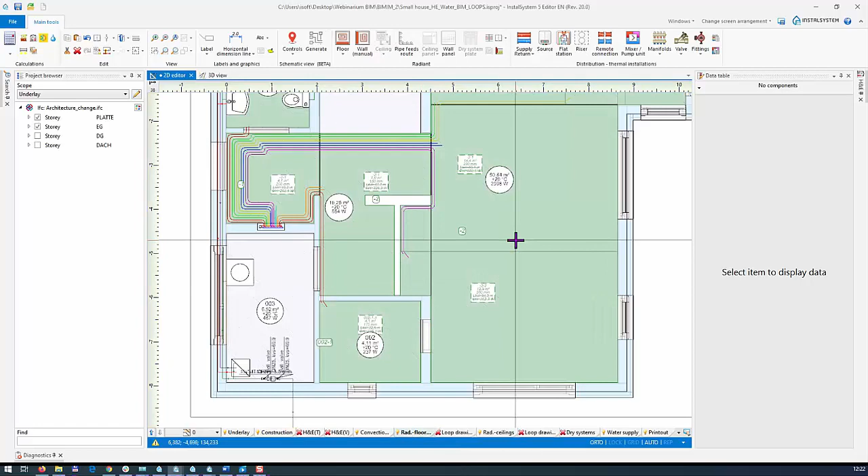At this point, after my modification, the layout of my loops installation and heating zones should be modified. It's enough to adjust the shape of the zone using the hot points. So when I go to floor and wall heating and cooling systems, just click on this, move the hot points, and make the same with this one. It's very easy and quick.

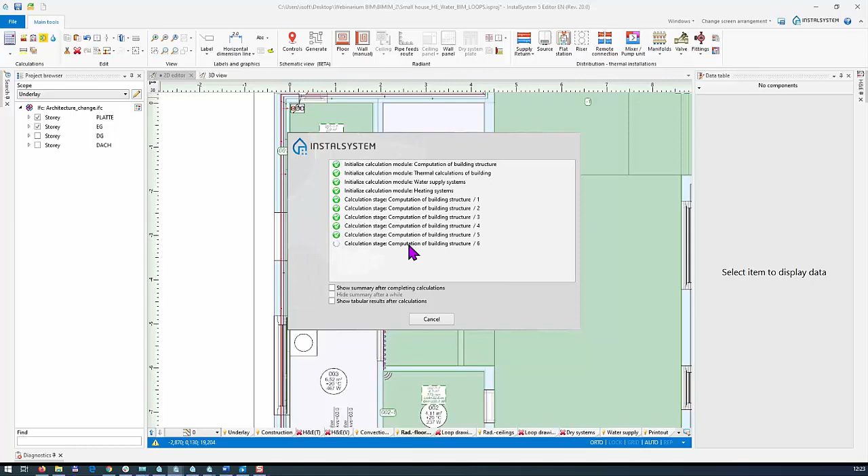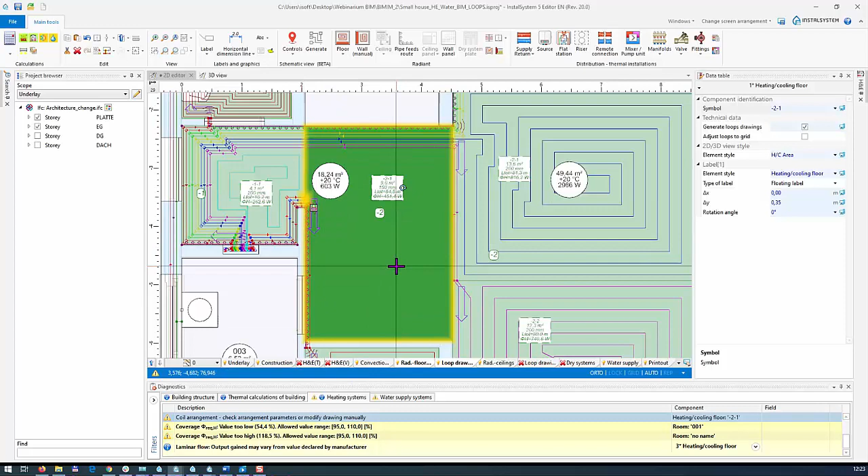Okay, and maybe I check the loops. I see that I don't have the loops on this one. Pipe spacing. Okay, it's very easy solution. Probably just grab this out to the other side, okay, and make calculation again.

Yeah, of course, that's all for this project. So when you go to the 3D view, as you can see, we make this change for this project, and then you can again go to the printout and just export this file once again.

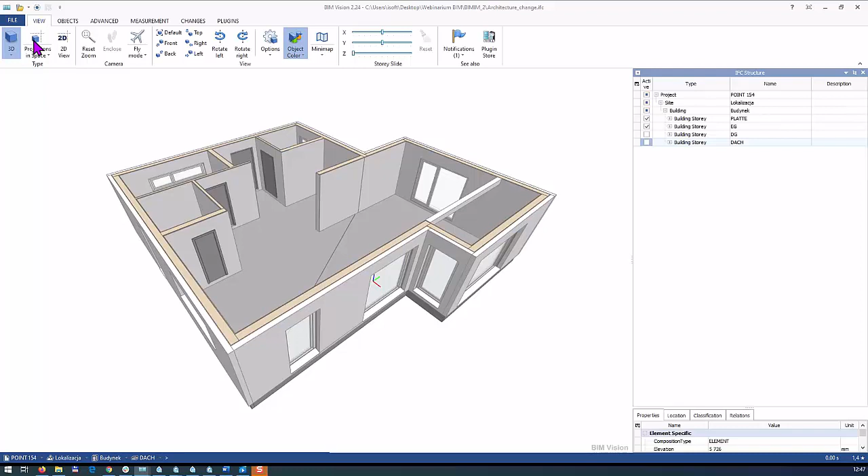Okay, I quickly change to the BIM vision, and after this operation, of course, I can add files. That's my first model. And as you can see, that's the new model, the IFC model on the new architecture.

At the same time, one designer might design, for example, a heating or cooling installation, and another a water supply system, and they cannot overwrite one file at the same time. They can exchange such files and coordinate with each other in order to avoid collisions. On the other hand, the native installation file is owned by the designer who is responsible for the design and changes.

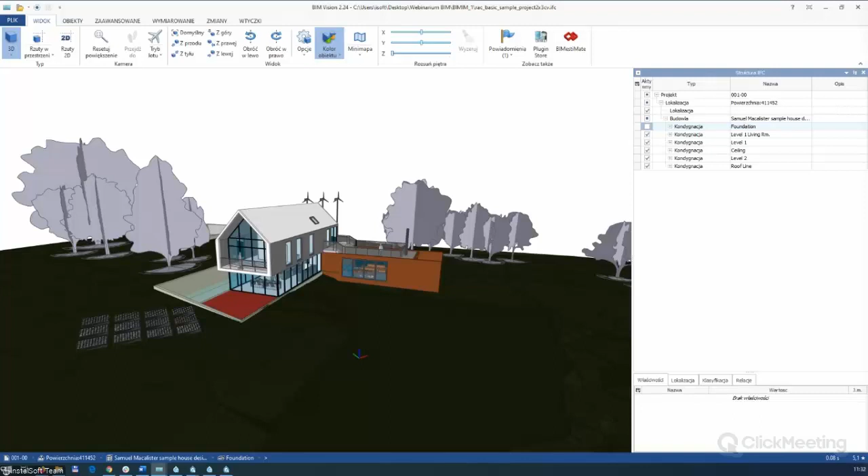Finally, let me show you the development version of our software. This is this one, okay.

I want to show you this because in the next publication you will be able to access the entire installation export interface, with the division into individual levels and installation types, elements, and layers. This shows, in the context of simultaneous cooperation on one project, what I mentioned earlier.

So remember that it's only our internal version of the software. Okay.

Okay, for this moment, I think that's all. I hope you see this kind of revolution. Maybe I'll open our dashboard. Okay. For this moment, I think that's all. I hope that you can see this revolution. This revolution.